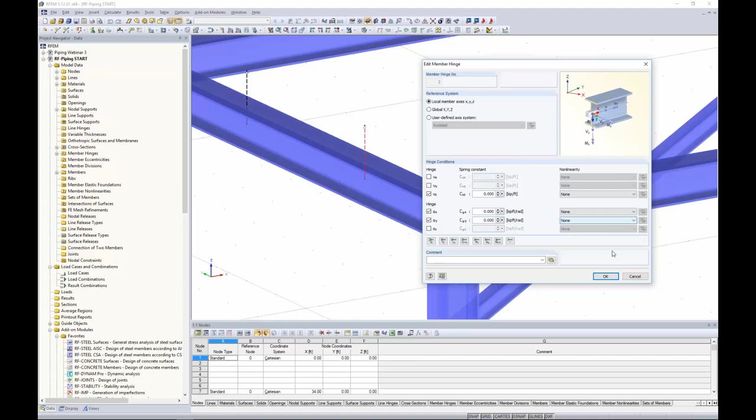Now, taking a look at the rest of the structure, these are just typical W shapes. We can use our project navigator over here on the left to view all of the input data. For example, the cross sections tree, we can see that the W8x35s are defined for most of our members within this pipe rack. We also have some diagonal vertical bracing, W4x13s. So that's really all that I've done so far.

Now, when you go to create a new model within RFEM, or after you've done, such as I have, created the model, we need to go back into the general data. So what we would do is to right-click on our model name, go into the general data, and under the options tab, you'll notice piping analysis. This option is only available if you've purchased the RF piping module extension.

So here we will check this checkbox, and under the details are some additional settings that we need to define. The first one is to define which standard we like to use. We have the ASME B31.1, 31.3, and recently added is the Eurocode.

This option down below at this checkbox is for welded forged T and welded in contour inserts. This just refers to a couple variables, RX and TC, that we won't be using today, but just keep that in mind if you are using those type of components.

The default branch connection type, this will make a little bit more sense later on. So for right now, we just want to set this to reinforced fabricated T, but just keep in mind that this setting is here and I'll mention it later on.

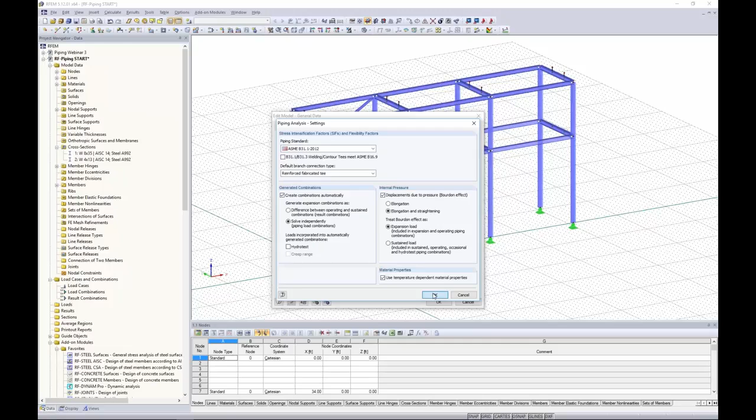When I click OK out of these dialog boxes, you'll notice I'm still within RFEM, but now I have some additional tools available for modeling piping systems. So we want to begin today by drawing a new pipeline—that's this first tool available in our new toolbar.

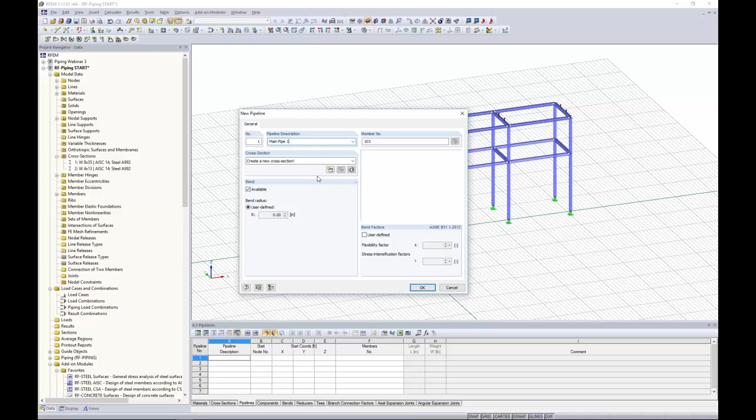For the pipeline description, we'll call this one main pipe 1, and we need to define a cross section. With the cross-section, we'll go into our database and several different manufacturers and standards pop up. You'll notice we have the ASME B31.1. We have NPS and DN—NPS is related to imperial units, DN is related to metric.

For our first pipe, I want to scroll down here to my 8-inch diameter, in particular 8.625, and the thickness of the wall is going to be 0.594. So I can see my cross-section populated here. If I have any questions about what variables are being used for my cross-section properties, I can open up this info box to see everything listed.

The material is also going to be defined within the same dialog box. Here we'll open up our material database. Over on the left we have some filters where we can filter down to the ASME B31.1. These are all the materials listed in Appendix A within the ASME standard, which is quite complete. For today, we'll just stick with A53 grade A, and here are all my material properties.

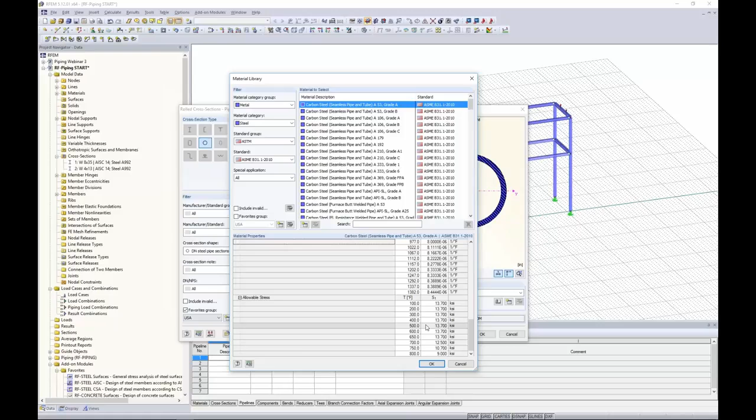This is what I mentioned previously—that as our temperatures are changing, so are dependent properties such as modulus of elasticity, thermal expansion, and allowable stress. These will actually change with each iteration as long as the temperature continues to change as well.

Now that we've fully defined our cross-section and material, both listed in that dialog box we were previously in, the line mass is nothing more than the density of our material multiplied by the cross-sectional area of our pipe to give us mass per unit length. The total line mass is correlated here just with the line mass we've defined so far, but you'll see this begins to change as we define some additional parameters with these other tabs up here at the top.

Design data is important because it relates to our pipe wall thickness checks and pressure checks according to the ASME later on. So we want to initially give some design data here that we plan to design this pipe to—for example, if we plan to use a pressure no greater than 500 psi, and maybe design around 85 degrees Fahrenheit, nothing too hot or extreme here.

The second tab is the bend. You can actually create a different cross-section for the bend of the pipeline, different from the straight pipe. This is important for things like thermal temperatures—they create much higher stresses at the bend. So if we wanted to change this cross-section to a thicker wall, we can do so. The rest of these parameters line up just like what we saw in the straight pipe tab.

Layers. We can include layers such as insulation, plating, and lining. For today, we'll stick with applying an insulation. We want to define the weight of the insulation as 6.37 pounds per cubic foot, and as well as the thickness. So we'll add 2 inches of insulation to the inside of this particular cross section.

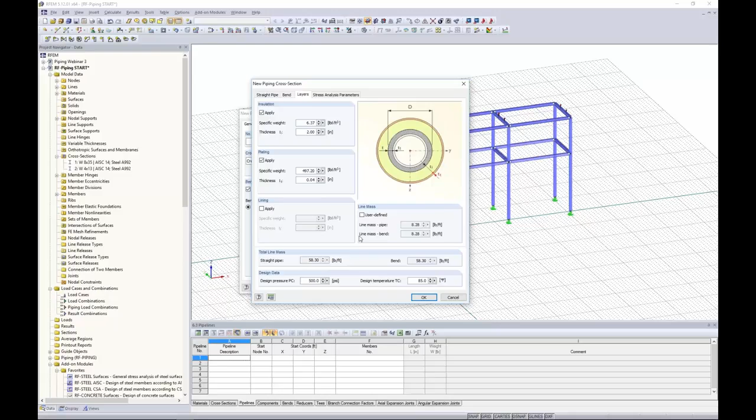We'll also add some plating. For this, the specific weight needs to be quite a bit higher at 497.2, just something that we're given from the manufacturer, and a thickness of 0.04 inches. Now you'll start to see this total line mass increase from what we saw with the first tab.

Because we're accounting for the additional weight from the insulation and the plating. Stress analysis parameters, well, here you can see there's corrosion allowances, mill tolerances, manufacturing allowances, and welding factors. Again, this is important for when we're checking the pipe wall thickness checks according to the ASME. There are some default settings in here, but by all means, you have control to override those for both the straight pipe and the bend.

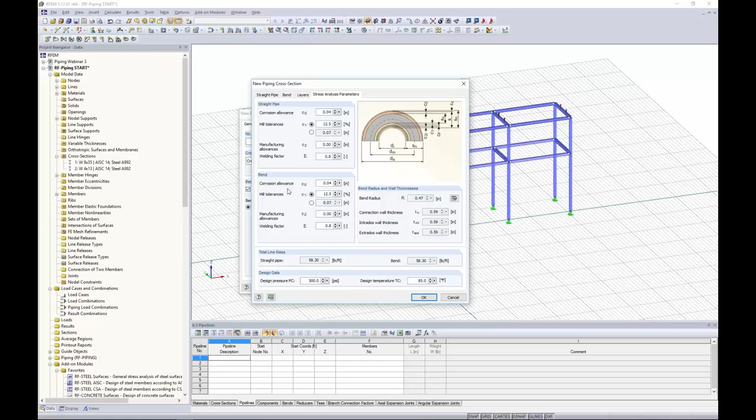Now I can click OK, so we're back to our original dialog box. So we define all the properties for our cross section. Now you'll also notice that we have bend available here.

What this means is that as I begin to draw my pipeline back here in RFEM, I can actually automatically create the geometry for the bends. So right now we have it set to the long radius. The bend radius is set to 12 inches. We can change this to short and use 8 inches, or we can choose a user-defined radius here.

The bend factors, these are calculated from the ASME. The flexibility factor has influence on the bending stiffness of the pipe bend. The stress intensification factor is something that will be used for design later on in our add-on module RF piping design. Again, you can override these with user defined as well.

So now that we have defined everything for our first piping member, what we want to do is to begin drawing it. You'll notice I have these crosshairs available in my graphical interface. What I'd like to do initially is to change the drawing grid around a little bit. So I'm first going to change the plane, and then I can easily select a different origin here. I'm going to snap to the top of this rigid link here.

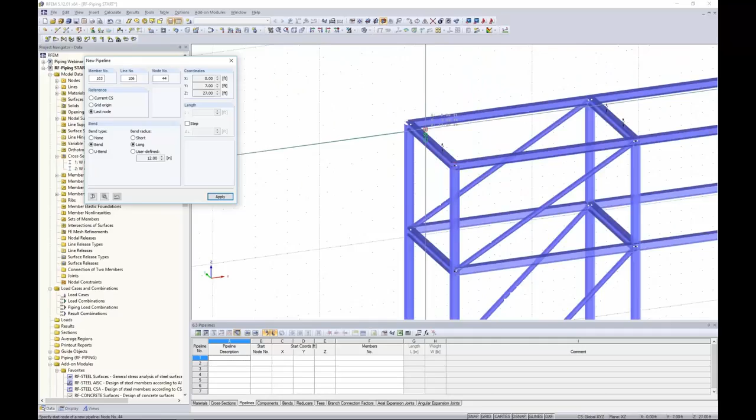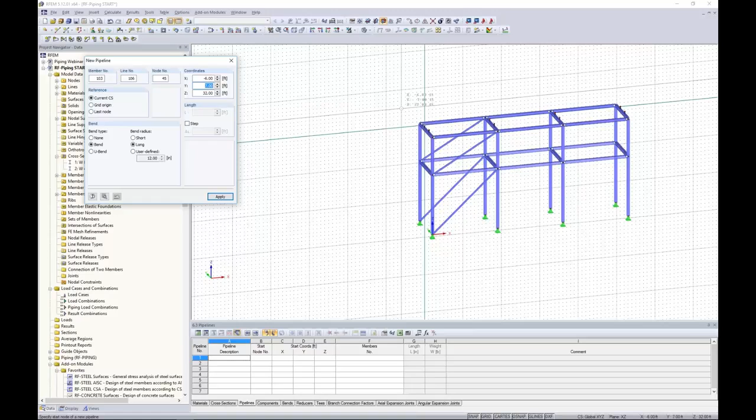So when I go to draw a pipeline, I have a few options. I can choose the current coordinate system, which is what I'm going to do. That will just leave this grid as it is. I can also choose a grid origin or the last node. The last node will dynamically change according to the clicks I make in my model as I begin to draw this pipeline.

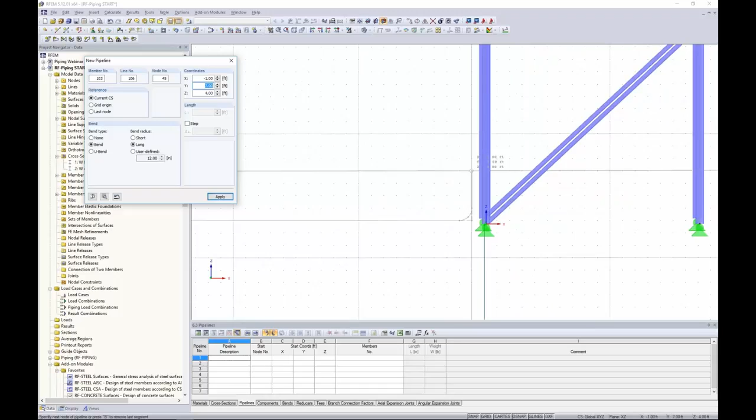So to begin with, we will start in an elevation view here, and I'd like to choose a point -25, 7, 0. So I make my first click, and then I go to a point about a foot away from the face of the supporting structure. Now you'll notice that as I move vertically up my supporting structure, the bend is automatically accounted for. So that's what the bend option does. We can see that right to the left of the supporting structure.

So we go all the way up to the top, and we can begin drawing the pipe across the top of the supporting structure. Now, keep in mind that this drawing grid keeps me in one plane, so I don't have to worry about flying off into space anywhere.

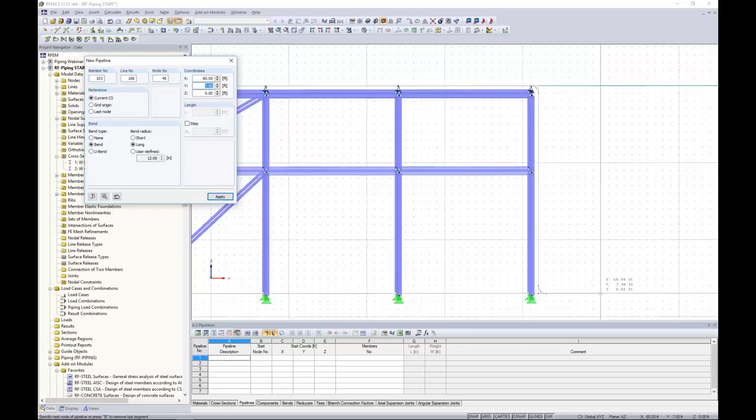Now, when we get to this point over here, what I'd like to take into account is maybe some additional bends to dissipate my heat from my temperature loads. So all while I'm still drawing this same pipeline, I can change my drawing grid back to the XY plane. Maybe I snap back to the bottom of my supporting structure. Then I can zoom in and continue modeling my pipeline here with some additional bends.

So once we are done with this, I will make my last final click here, and we'll snap to a point and right click to finish it. And now my piping is complete. So you can see that if everything goes well, you should have the name of your pipe here called main pipe 1. That's the description that we gave it.

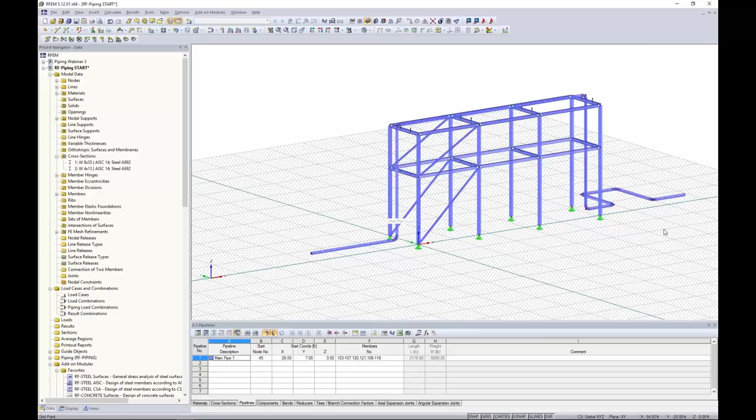Now I want to create an adjacent pipe right next to it, and utilizing some of the features within RFEM to make our life a little bit easier, what I'm going to do is to turn this into a wireframe display model. Now I'm going to highlight my important nodes here, the nodes where the bends occur, by holding down my control key and selecting all of these main nodes where the pipe makes some bends.

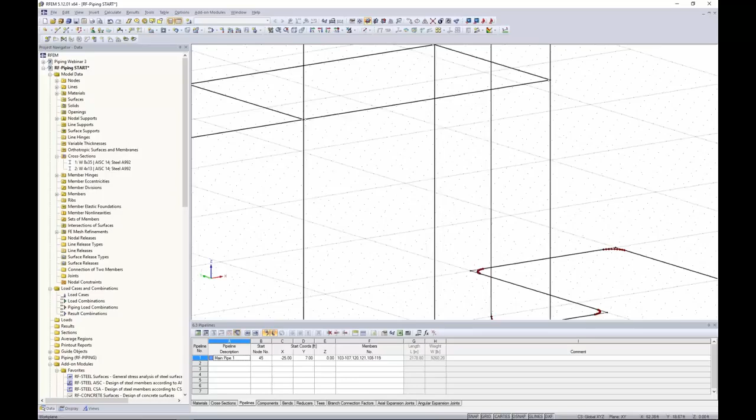Once I have these selected, I can use my Move Copy tool. I'll create one copy and move it -4 feet in the global Y direction. I click OK, and now you'll see those copied nodes are available here.

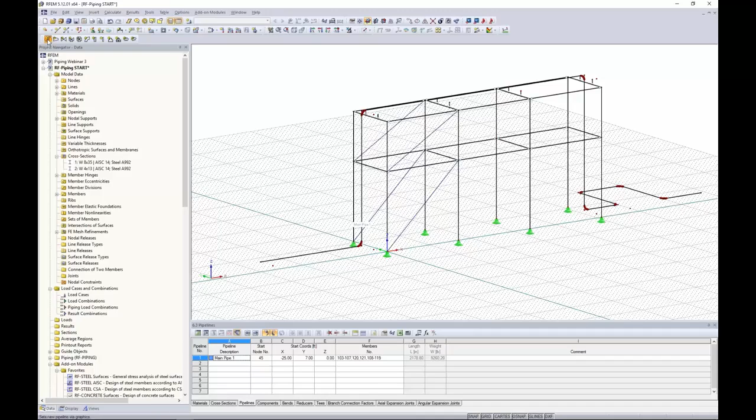So what I'm going to do is create a new pipeline, and this time we'll call it Main Pipe 2. Now the cross section, I've already defined that 8-inch diameter pipe with all the insulation and cladding, so that's available for all my pipelines to use in this model. I want to use that same cross section, so I don't need to redefine anything. I'll use the same bend as well, and I can click OK.

The reason I created those nodes is so I can easily snap to them here without having to change my work plane like I did previously. Just using some of those special features we have in RFEM to make modeling a little bit quicker, and I right-click to make my last point.

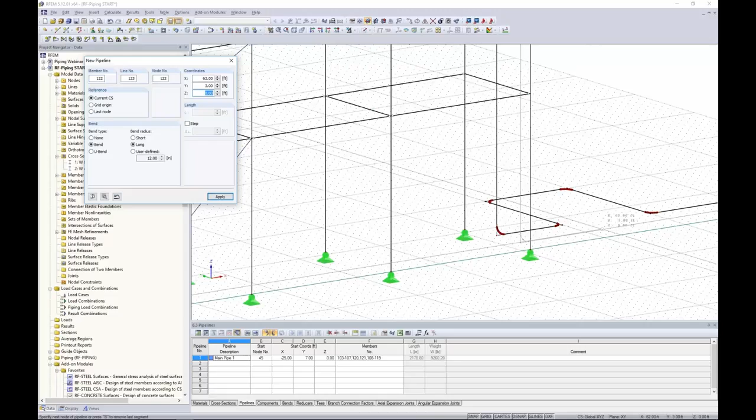If I turn this back into rendered view, let's say this pipe really would like to extend out a little bit further than what I have shown. Instead of redrawing everything, I can take this node and simply drag and drop it so that it's adjacent to my Main Pipe 1.

And again, everything went well. We see the name Main Pipe 2 here. Now the pipes are kind of blending into the rest of the structure, so you can't really tell what's going on.

Under the Display tab in the Project Navigator, this controls everything we view graphically, whether that's input data or our results we'll see a little bit later on. If I scroll all the way to the bottom, I have this option to change my colors and graphics according to criteria - right now it's just set to the standard.

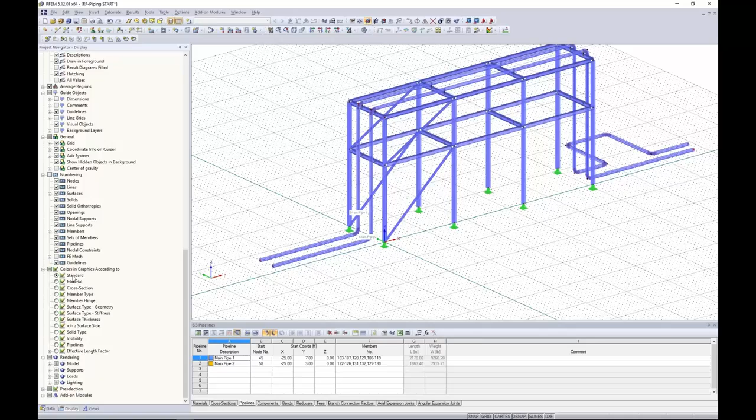We can choose material, cross-section, but we also have pipelines. When I choose that option, my panel pops up and shows me exactly what my Main Pipe 1 and Main Pipe 2 are with different colors, setting them apart from the rest of the supporting structure.

What I'd like to continue doing is draw in a couple of straight pipe members, just short segments that frame into this Main Pipe 1 so we have some intersections. I'm going to go back to the new pipeline, and we'll just call this one Pipe 1.

I want to define a new cross-section here, so up pops our cross-section database. You'll notice we can go back in and filter through this long list. We also can create a favorites group - by activating my favorites group, I've edited it so I've just added the 2 cross-sections I'm using in today's webinar. You can imagine that if you use a handful of cross-sections quite often, this is a great way to quickly select them.

For this one, I'll choose the 6-inch diameter pipe. We have a wall thickness of 0.31. My material is remembered from my last cross-section, so we don't need to make any changes. I click OK. As far as the rest of these tabs - bend, layers - I'm going to keep everything as default. I'm not going to add any insulation to this. I'll set the design temperature to 585 degrees Fahrenheit and click OK.

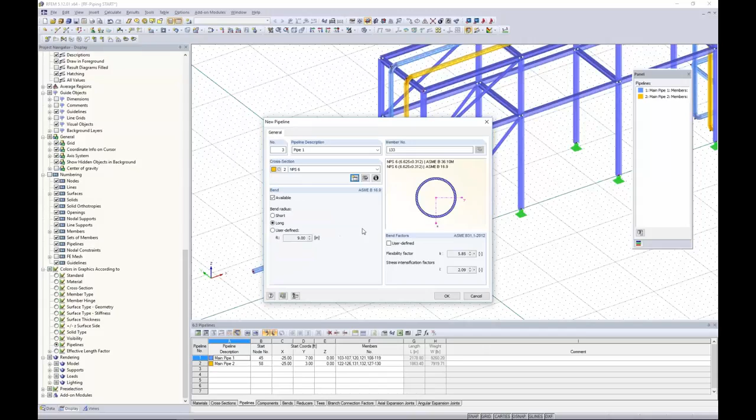I click OK once more, and I think it's easiest to change this to my current coordinate system and to change this to wireframe view. That way I can zoom in here, and my first point I'd like to choose is -1570. Then all I need to do is snap to a point which extends out. I right click - that's my first pipe.

Creating once more a new pipeline, we'll call this one Pipe 2. I've defined that smaller section, so I always have that available in this particular model. I click OK, and then I can again change this to current coordinate system - that's what I prefer to work with. Here we'll choose -870 and snap to a point out here, right click.

Showing the rendered view, we now see those additional pipe sections shown here, and everything is colored differently so we can tell it apart. Now that I have modeled my pipelines, let's move on to the piping components - that's where the rest of these tools will come into play.

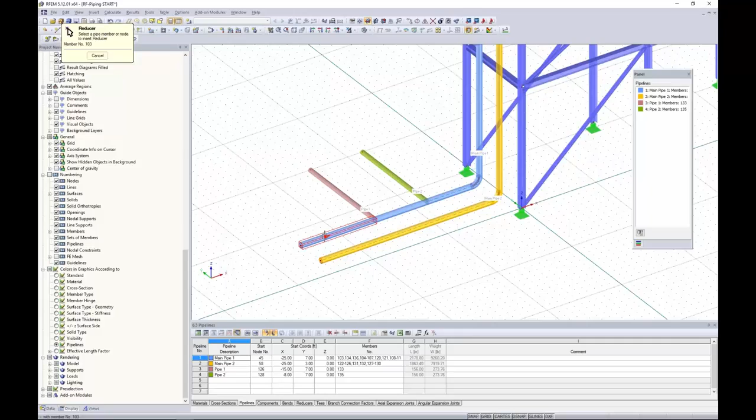So the first thing we want to define is a new reducer. When I click on new reducer, the program requires me to click on the pipe I'm going to apply this reducer to, so I click on this first pipe section here. Now, reducers are used to transition from a larger pipe to a smaller pipe, or vice versa.

Within this dialog box, the first thing I need to define is which dimension to change, towards which node. This is actually opposite of what I want to do right now, so I'll click on my beginning node here. You'll notice my reducer start allows me to choose that smaller cross section we've already defined, or you can create a new section.

The reducer end is grayed out because this is going to transition into the pipe I already have defined. What I do need to define is where this reducer starts, so we'll start at about 48 inches from the start, and you'll notice this big red arrow pops up exactly on the pipe where we're going to apply this reducer. The length can also be applied at 12 inches, and there's our second red arrow showing us where the reducer end is.

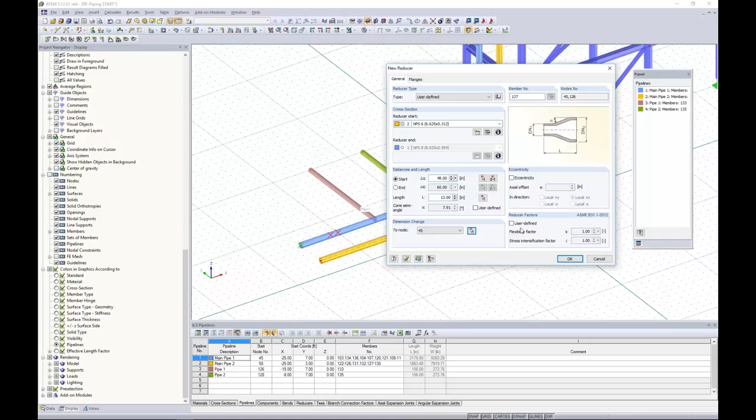You can also define an eccentricity here. Eccentricity would be useful if you want the bottom of the pipes to be flush. In our case it doesn't matter, so we'll keep this as is. Again, the reducer factors can be overwritten here if you'd like to do so.

Now, for a lot of these components we do have a library. Unfortunately this library is more relevant to Eurocodes and European manufacturers. This is something we do plan to implement with some US manufacturers in the near future, but for now it's easy enough to just set this as user defined.

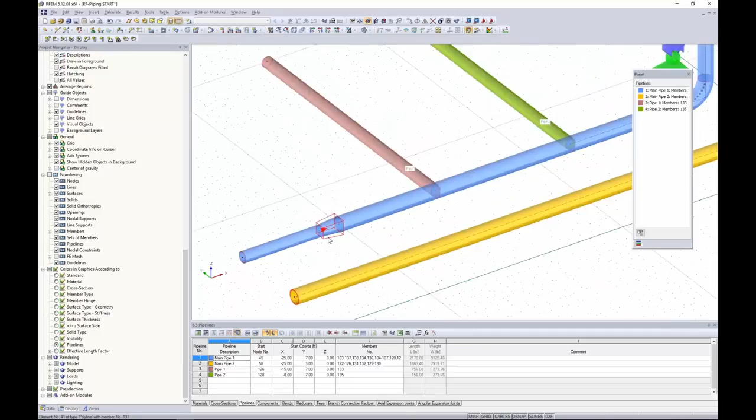For flanges, this is where maybe we would weld flanges to our pipe and bolt them together at this reducer location. Now, I'm not going to apply flanges, but we'll do this plenty more times with other components today, so that will be more clear in just a minute. And I click OK. Now if we zoom in, we can automatically see that reducer applied here with the smaller pipe section on the left.

Moving down our list here, we have three options for valves: a two-way valve, a three-way valve, and a four-way valve. Pretty self-explanatory - a two-way valve is used for two pipes connecting together, a three-way valve would be an intersection of three pipes, and a four-way valve of four pipes.

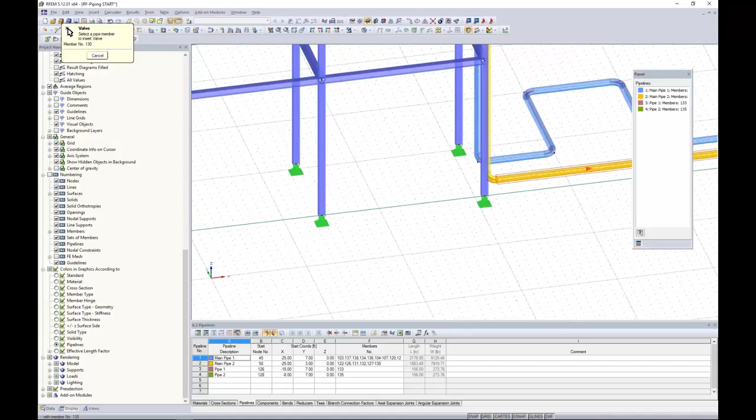Starting off with our new valve, just two-way, we're going to move to the other side of our model, and in particular main pipe 2, we're going to select this pipe here. So up pops our dialog box for a new valve. We just want to specify where this begins, so we'll start at 12 inches from the member start, indicated by my red arrow here.

The length will be 12 inches, and we have some parameters here that are automatically created, such as the multiplier of the insulation mass set to 1.75, and the multiplier of thickness set to 3. You can override those, which ultimately affects our mass here, or you can set a user-defined mass as well.

The flanges - this is where maybe I do want to apply some flanges. We're going to plan to weld those flanges to both the valve and the pipes and bolt them together. So for our flanges, we want to check the checkbox that those are both available.

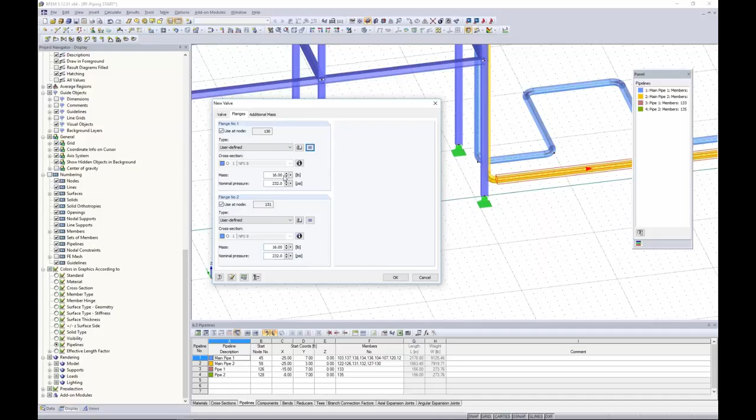Our nodes are automatically generated here of where that flange is going to occur, and we can simply define the mass here of our flange as 16 pounds, and maybe the nominal pressure is 232. Again, this is just information that we would get from a manufacturer. What's also nice is that I don't have to re-enter this information, but I can just set it to all - this will automatically populate the same flange settings for my other node.

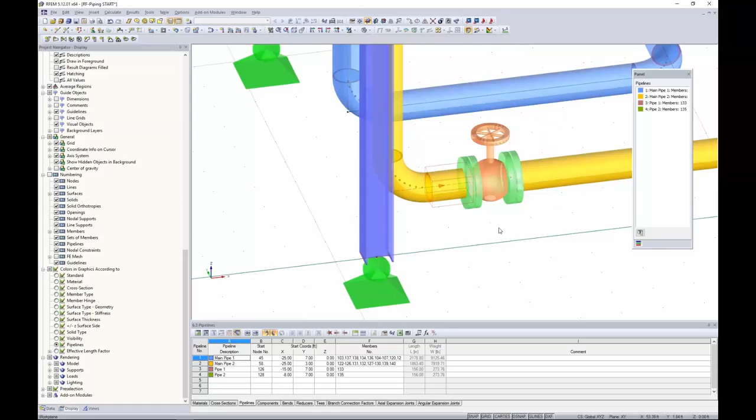Now, the additional mass tab here is useful for our hand wheel if we have additional mass we'd like to take into consideration, as well as the eccentricity away from the original flange - something to keep in mind. Once I click OK, we can see that flange is automatically created visually here and will be taken into account for stiffness, analysis, and design. So that makes sense for our two-way valve.

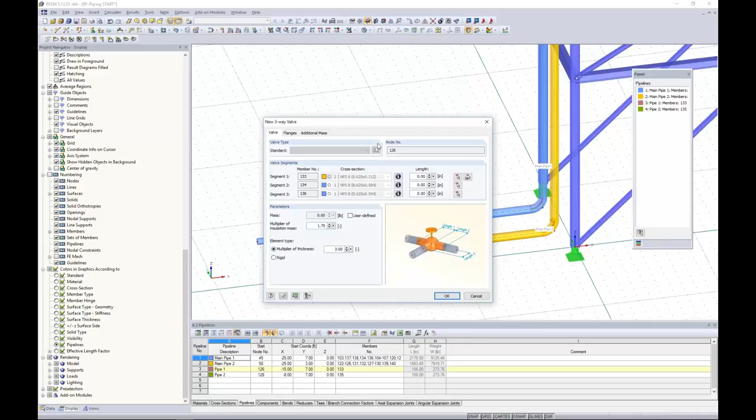Now, in a similar sense, we will apply a three-way valve. Instead of selecting a pipe, we have to select an intersection. So I select this first intersection here where we have pipe 1 framing into main pipe 1. The cross sections are automatically generated according to what we have modeled in RFEM, and we want to give it a length for all three piping components here, 12 inches.

Our red X indicates where that occurs. Parameters, same thing that we saw within the two-way valve. We have a multiplier of insulation mass, multiplier of thickness. Our flanges here, we do want to create flanges at all locations.

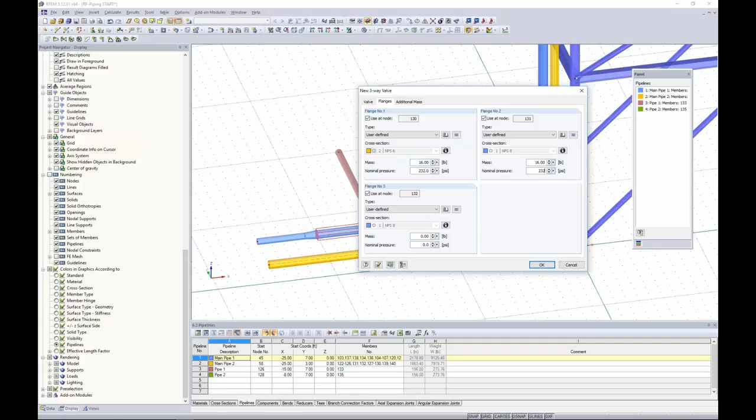This will be 16 pounds, 232 psi. Now if I try and set this to all, you'll notice nothing happens for my other two flange entries. The reason is because we have a different cross-section defined here. The program will only automatically assign the flanges to the same cross sections. So if I move over to my 8-inch diameter pipe and type in 16 pounds and 232 psi, and click equals, that will set the flange for the third node automatically.

The additional mass can be considered with the hand wheel here. Once I click OK, we should see that three-way valve generated graphically. So that's what a three-way intersection would look like.

Now, four-way intersection, same concept. We don't have any intersections of 4 pipes here, so we won't be applying that today.

Right next to that is the new bend. A new bend is useful had I not created, to automatically create the bends when I drew in my pipeline. So perhaps these two elements here, these two pipes connected at a 90-degree angle, and I wanted to go back in afterwards to create that bend. You can always do so with the bend tool up here, define the radius, define a different cross section if you'd like as well.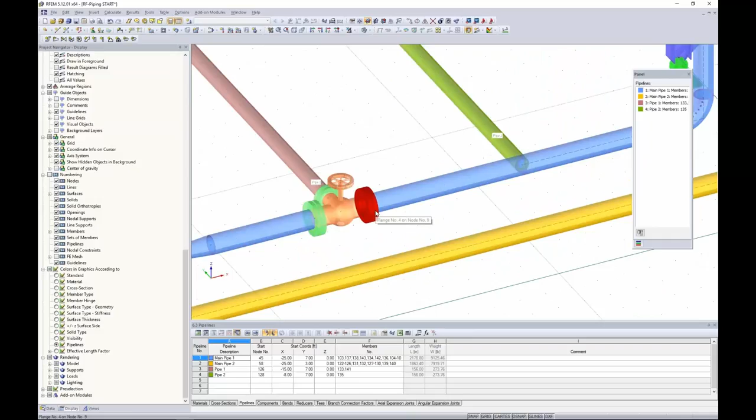Next to that is a new flange. This has nothing to do with some of these other components, but you can purely apply just a flange to any segment of a pipe. This might be useful if you have 2 extremely long pipes and you would like to add a break there, bolted together with a flange. You can do so by adding in that flange.

We also have a new blind flange. This would be able to lock nozzles and piping ends. So for example, we could add a blind flange here at one of our piping ends.

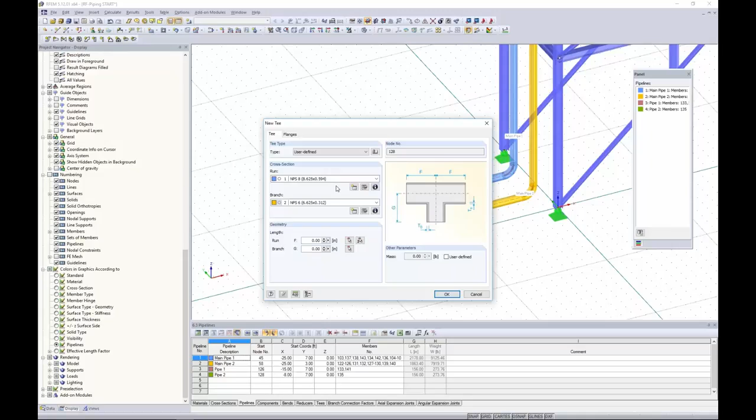A new tee would be an intersection of 3 pipes, such as what we see here with our pipe number 2. Nothing too fancy with this. We have the cross section defined with the run. The program automatically assumes that's our 8-inch pipe, and the branch is going to be the smaller 6-inch pipe. Then we just simply define the geometry, and again, we can add flanges here.

For our case, instead of doing this, I'm actually going to apply a new branch connection. So again, I click this intersection. Now with the branch connection, remember back in the general data, I said that we had to set a default option for the connection type. Well, that's where this comes into play.

So we set the reinforced fabricated tee so that automatically when I jump into this dialog box, this is what will always be automated. Now, if you use something else quite often, then you probably want to go back to the general data and change that default value. You can always come in and individually select them as well. So for us, we're going to choose a reinforced fabricated tee.

All of our cross-section dimensions and factors are automatically calculated here, but what we do need to define is the thickness of our reinforcing pad or saddle thickness. This is important to give the pipes some additional reinforcement or thickness at maybe where we have some high stress locations. For today, maybe we put in a 1/4 inch thick saddle thickness and weld that directly to our pipes. Once that's done, I click OK.

Now this is indicated graphically with just a ball at that intersection. As far as the other 2 options here for axial expansion joints and angular expansion joints, I will get into that later after we do design. So for now, we'll continue to move on.

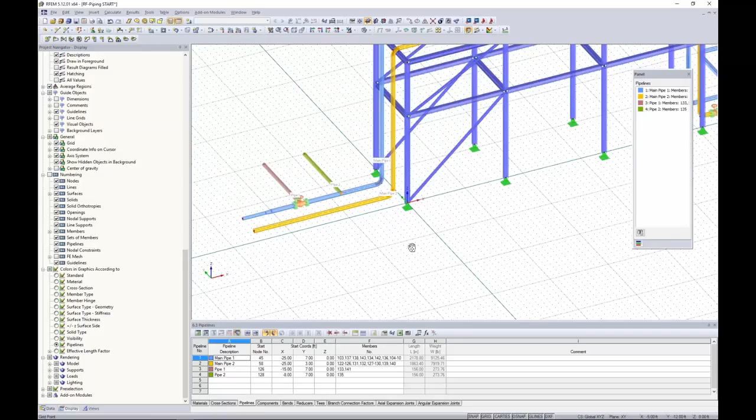So before we can start loading our structure, we need to support it. Just like we support our piping members before loading, we need to support them. Just like we supported our supporting structure here, you can see at the bottom of the columns we have nodal supports. We have to do the exact same thing to our pipe elements. So we don't have any additional features for supporting the pipes. It's just what you would use in RFEM for all the rest of your members as well.

So in our case, we want to create a new nodal support. Now with a nodal support, we have 6 degrees of freedom, 3 degrees in translation, 3 degrees in rotation, that we can fully fix or fully release.

We also have a spring constant here. So if you have something that's not fully fixed, not fully released, but somewhere in the middle, you can define a spring constant and you'll have partial fixity.

Lastly, we can define nonlinearities. It's not completely uncommon that maybe for a piping support, you have some type of friction support, so it's dependent on your normal forces. You can define all that with the nonlinear capabilities within the program. I'll repeat this again, but nonlinear supports is something that cannot be taken into account with result combination. So just keep that in our heads, but we'll revisit that later.

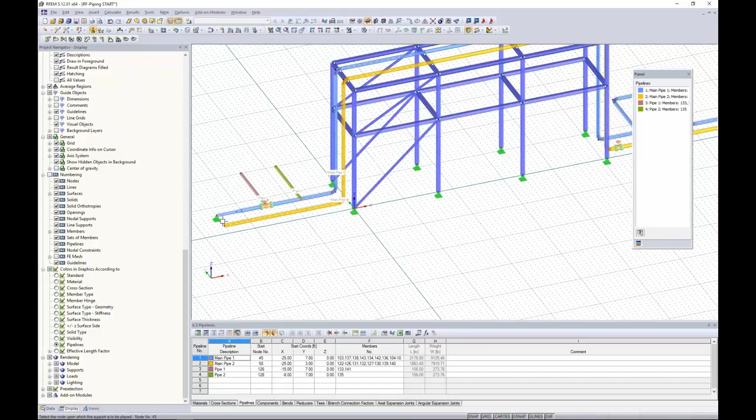So for today, we want to use just a typical hinge type application, one of the default options within the program. I click OK. So what I'm going to do here is simply click at the ends of my pipes to support those with that basic nodal support.

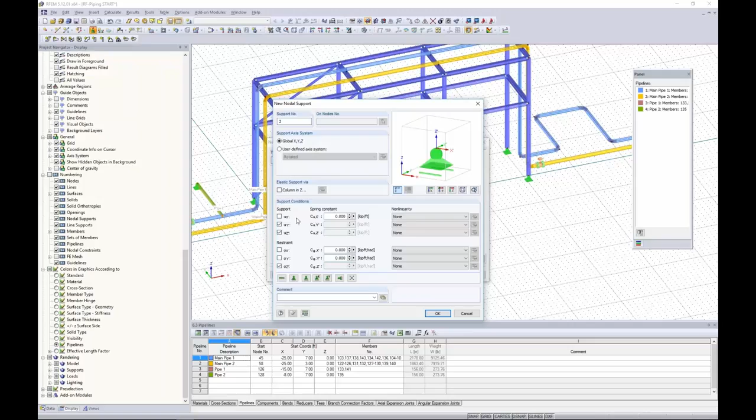In a similar concept, going back to my nodal supports, I'd like to define a new definition. And this time I want to fully release it in the X direction, so some type of roller support that allows translation in the global X direction. I can click OK, I click OK.

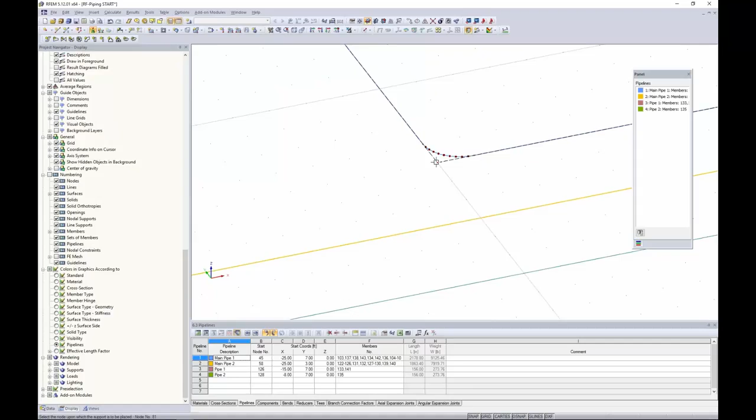So now for this type of support, I'm going to turn this into wireframe view and zoom in here. These will want to be applied right at the bends of the pipes. Now I'm not applying it at this node, which kind of indicates where our bend occurs, because this node doesn't technically lie on the piping member. We need to apply it directly on the pipe.

So for this, I'm just going to highlight these nodes right at the bends on both sides. Once we've completed on the right side of the structure, we'll zoom in to do this on the left side.

Now, once more going back into the nodal support, because I've defined these new nodal supports, I can always select them within my drop-down box here, but I want to create one more definition, and we're going to release this in the global Y direction. So this will allow movement in the global Y as a roller support.

I click OK, and that's where we want to maybe apply this to our pipes up here where we added in these additional bends. Okay, so now our structure, including our pipes, are fully supported.

What I'd like to move on to now is loading of the member. So for this, we want to create some additional load cases. I go to add a new load case, and up pops my load cases and combinations dialog box.

Now, for those of us who are familiar with RFEM or just structural design in general, we of course have action categories according to the ASCE 7 or the NBC, according to live load, dead load, wind load, and so forth. But when you have the RF piping module activated, you'll notice that we have several more action categories available here for our piping load combinations, such as piping self-weight, we have fluid, we have pressure, snow, wind, even cold springing, hanger, hot loads, and cold loads.

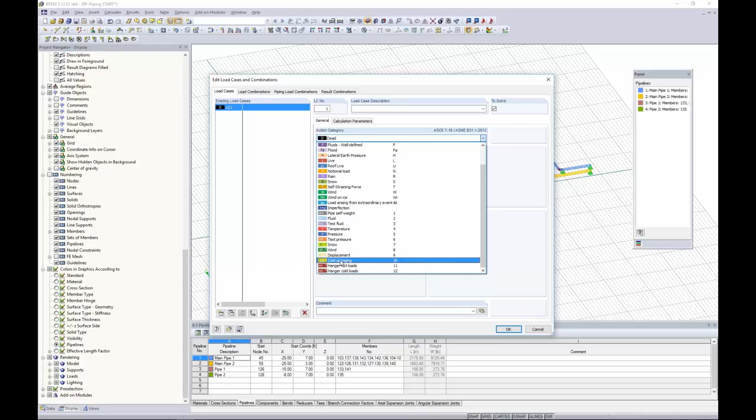So for our first load case, we will define a pipe self-weight. We'll give it the name pipe self-weight. The self-weight will be activated here with this checkbox as -1 in the global Z direction.

Now we create a new load case. We uncheck the self-weight because we don't want to account for that twice. This one will be for fluid, and we'll call this one pipe fluid.

We create another load case. This time we will name this one temperature 1 and assign the appropriate action category. I can make a copy of these as well. So now all I need to do is redefine temp 1 to temp 2, creating another load case such as pressure, and we'll call this one pressure 1. Making a copy, we'll call this one pressure 2. So now all of our load cases are complete.

I've applied no loads, but I've just defined the load cases that eventually those applied loads will fit into. So now I want to take a look at my piping load combination.

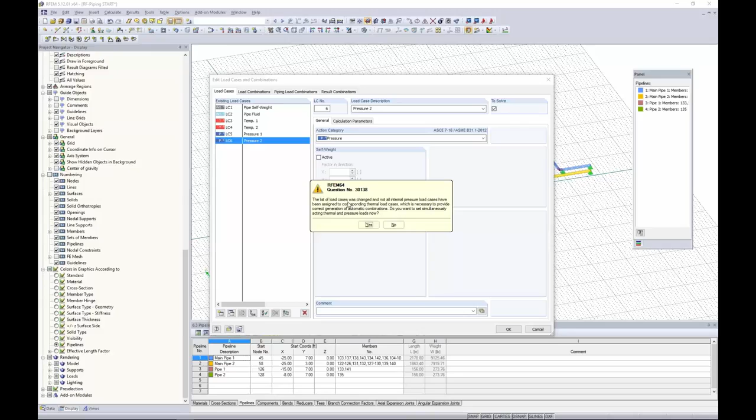So when I try and click another tab, I automatically get this RFEM question. It tells me the load cases were changed. Not all internal pressure load cases have been assigned to corresponding thermal load cases. Do I want to do this now? Yes, I do. So now up pops an additional dialog box, which simply assigns my temperature load cases to my pressure load cases.

Now the program makes some assumptions here, but if I don't like these assumptions, I can always use my dropdown to make changes, or I can add in some different combinations here. So that's important for our load combinations.

Under the piping load combinations, we see some automatically generated load combinations, such as for sustained, for operating, and for expansion. So these are the various stress types, and they are incredibly important because this tells the program, once we get into design a little bit later on, exactly what load combinations to use in each of the particular sections

Now, had I chosen to create these load combinations manually, I still need to assign a stress type. Again, it's important for our ASME code design later on.

When we take a look at the sustained, take a look at self-weight, pipe fluid, pressure, maybe no content weight is just the self-weight. We also have the operating, which is going to be all 4 load cases acting at once.

Now we get into the expansion load cases, and this is something that is very important and relies on our settings and our general data. So remember how I said we're not going to create result combinations, but rather we're going to create only load combinations - well, this has to do with these expansion loads.

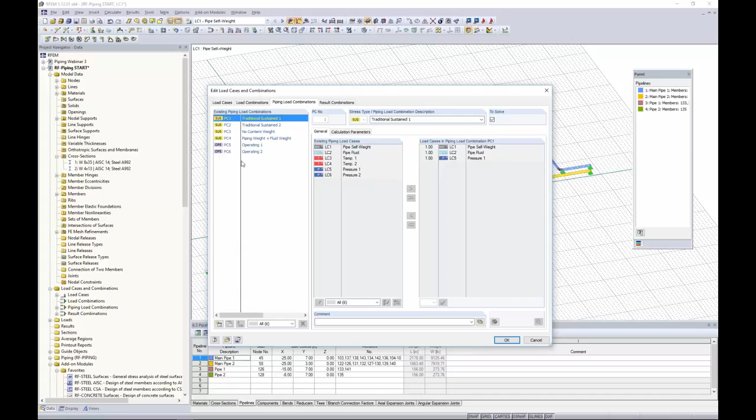So going back into my load cases and combinations, looking at my piping load combinations, you'll notice my expansion loads are now gone. Those load combinations are not being generated here, but rather they're now under the result combinations.

So how is this different? Well, it's still called the same expansion 1, 2, and 3. But now when I look at the details of this, what's happening here is I'm taking my load combination PC5, which is my operating 1 load. I am subtracting out, indicated by this -1 sign, PC1, which is my load combination for traditional sustained.

So to make this a little bit more clear about what's going on, let's go back to our piping load combination. So we're taking PC5, which is all 4 load cases applied at once. We're going to get the stresses and everything from this. Then what we're going to do is we're going to subtract out the internal forces and in turn the stresses that are generated from this traditional sustained, which you'll see is all 3 load cases, but temperature is not included. So all we're left with is just the stress generated from the temperature.

Now this result combination makes a whole lot more sense than what we saw previously under piping load combinations. The reason for that is because we're probably not, actually we'll never have the temperature applied alone. Of course, there's got to be self-weight, there's got to be fluid running through the pipe, and so forth.

So that's why this makes a whole lot more sense. But there's the downside that material nonlinearities cannot be taken into account, as well as geometric nonlinearities. So when I mention things like the nodal support with friction or sliding, that's a geometric nonlinearity. You'll get a warning message for your result combinations, and they cannot be taken into account accurately. So just something to keep in mind, it's kind of either or.

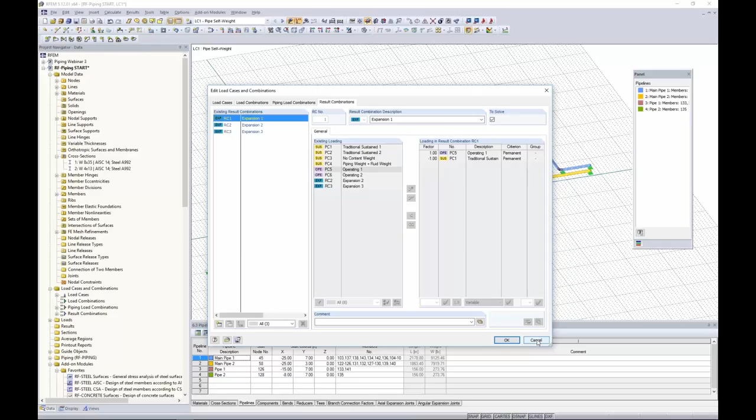So for today, what I'm going to do is to go back into my general data. I'm going to change this back to solving independently because I am using my temperature dependent material properties.

Okay, so now that we have these load cases defined, you'll find those in our drop-down box available up here in our toolbar. We want to begin loading the pipes.

So we'll start off, pipe self-weight, we'll just leave this as is. We won't apply any additional loads. Now the piping fluid - what I'd like to do is to select all my members to apply the piping fluid to. Now right now it's kind of confusing with my supporting structure.

Under the Views tab, we have some generated views that as we began to model, the program generates these. And one of those options is the pipelines tree here.

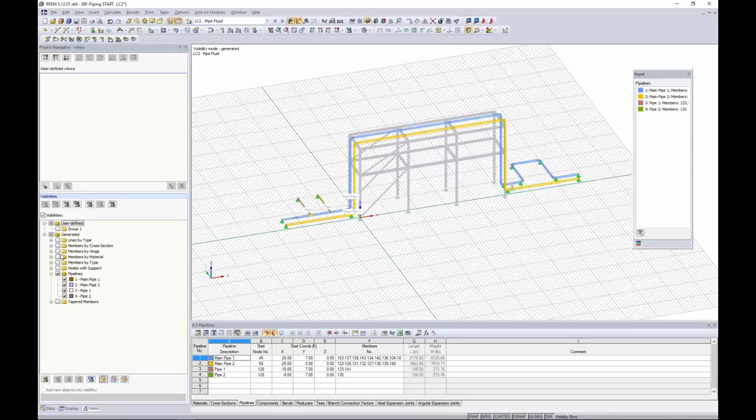So what I can do is check this checkbox, and now my supporting structure I can no longer select - it's not visible. What I can do is make changes and select all of my pipelines. So that's a useful feature, this Views tab, if you're looking to highlight various options within your model.

I'm going to highlight all of my members and apply a new member load. Member load is exactly what you think - we can apply a force along a member, but for our pipes today we want to go under Extra, where we have the option for pipe content full. This assumes the pipe has all the fluid fully contained and completely full, and all we need to do is give it a specific weight.

The other option is pipe content partial. This is nice because if we know the pipe is only partially filled, all we have to do is specify the distance D in inches, give the specific weight, and the program automatically calculates the internal force based on the fluid partially filling the pipe. For today we'll assume it's completely full, with water being applied through these pipes, so a specific weight of -62.4 pounds per cubic foot.

I click OK, and now visually I can see this load being applied to all of my members here.

Now I changed my load case at the top to temperature. My members are still highlighted, so we go back into our new member load and apply a temperature - here we specify perhaps 65 degrees Fahrenheit, nothing too special. I click OK, and graphically we can see this temperature load applied to all of our pipes.

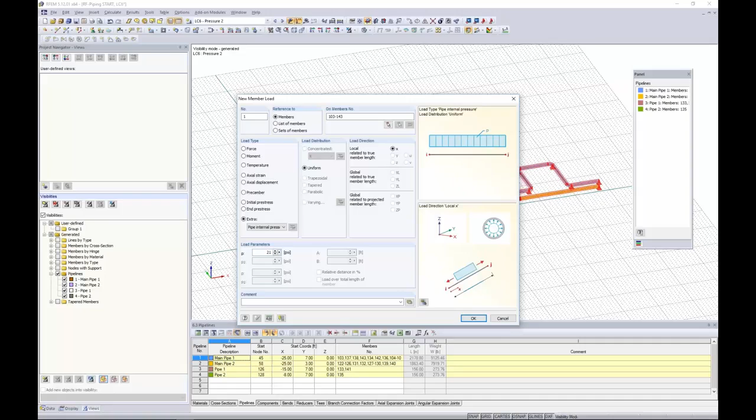Lastly, one more load for pressure 2, just changing the magnitude here to 218 psi, and I click OK. So now these loads are done, but what's nice is not only can I scroll through my load cases...

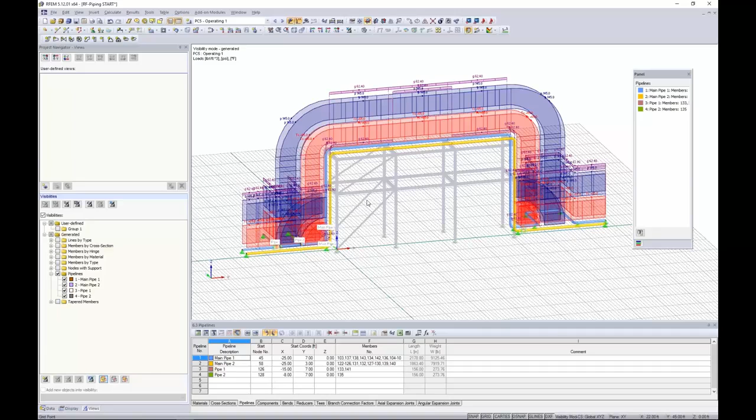...but maybe I'd like to take a look at some of my load combinations - for example, operating. This is with all 4 load cases acting at once, so I can see those loads stacked on top of one another and exactly how they're going to be applied visually to my particular members.

Okay, so now we're ready to run a design for the ASME. We've fully loaded this structure, fully supported it, and added in all of our piping components. Everything looks to be good.

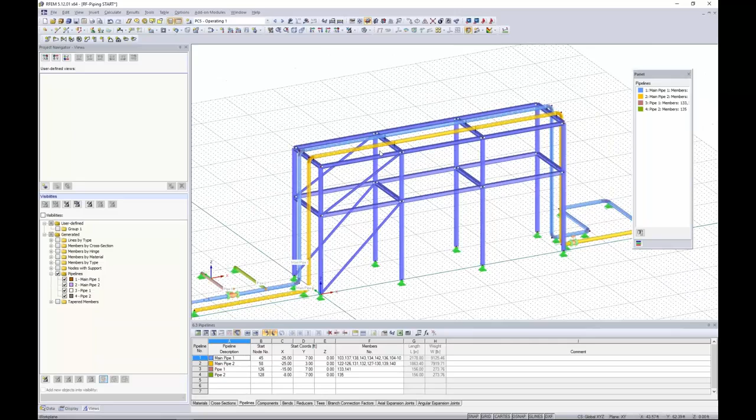So now we'd like to move on to the Data tab. You can see here our long list of add-on modules, and in particular we want the RF Piping Design module. Any one of these modules you can right click and choose as your favorite to move it up to the top of the list. So we're going to launch RF Piping Design, design of piping.

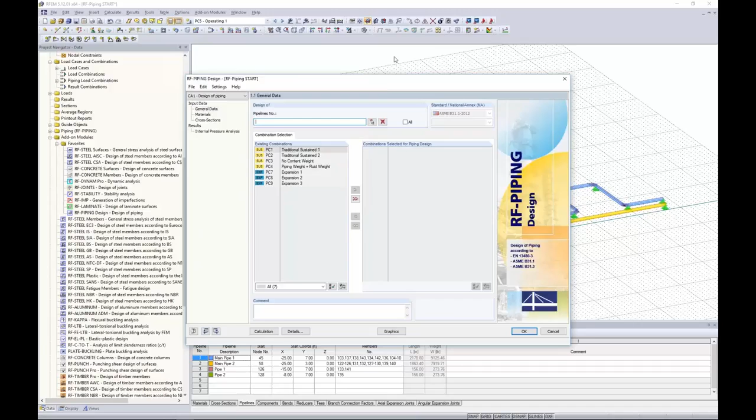Now this is just a simple dialog box - those of us familiar with RFEM, this module looks like all the rest of them. So what we'd like to first define here is the pipelines to design. I can simply select my All checkbox, so now we'll design pipes 1 through 4.

Now the standard can also be selected, not here, but back in the General Data tab. This is a little different than some of our add-on modules - that standard has to be generated within the general data. We did select B31.1. I'm going to move all of my load combinations to be considered for piping design, so you can see here my sustained and expansion loads are going to be utilized appropriately within the ASME.

Now moving down the list, I have my materials - this is my A53 brought in from RFEM, so I don't have to redefine that. What's further defined are just some of those material properties, if I'm curious to see those again.

Cross-section, same concept. Those are brought in directly from RFEM. I don't need to do anything further with these here. Here are my cross-section properties given to me again.

You'll notice that I actually have results available even before I've run a calculation within the program. This is checking our wall thickness and our pressure, doing a couple checks from the ASME, all without running a calculation. So how is this possible?

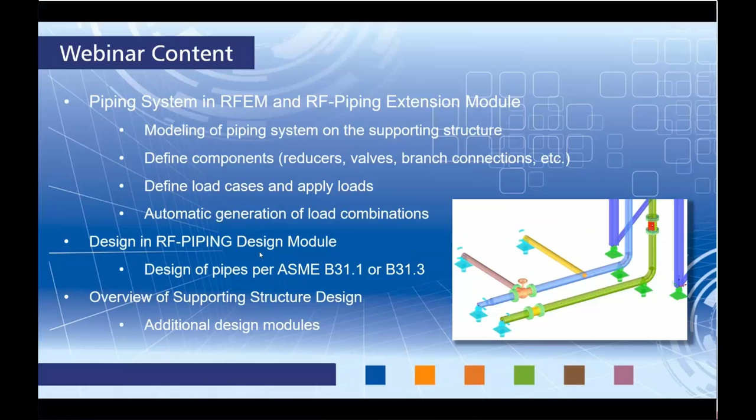For this, I want to jump back to the PowerPoint. This section within our RFEM add-on module is called Internal Pressure Analysis. It refers to the ASME B31.1, section 104.1.4. This allows us to check the minimum wall thickness for pressure and temperature. That's what these equations are given within the standard, equations 11 and 12 at this section.

Now there's 2 equations here, so we have some variables that we're looking at. The first variable, P, is going to be referred back - remember when we created our cross-section and I said let's give a design pressure here. So this is what I'm telling the program: I plan to design this pipe for 500 psi or less. That design pressure value is going to be utilized within these equations as P.

We also have some other variables: capital D sub naught, which is our outer diameter, and smaller d, which is our interior diameter. That's why there's 2 separate equations here.

We also have SE, which refers to the max allowable stress based on our material for our particular pipe. We have a couple other variables, W and Y, which are the weld strength reduction factor and the coefficient directly from the standard. Both of those are dependent on temperature. This is why we defined a design temperature, because these coefficients may change as well as some other parameters depending on what our design temperature is.

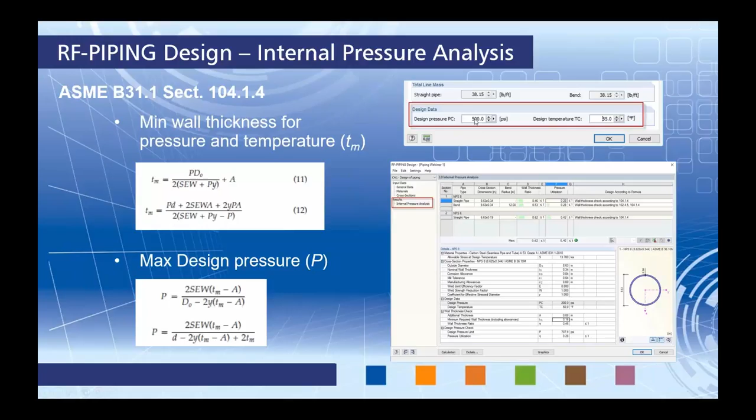So we cannot exceed this max design pressure, which will double check that to what you have entered in here for your cross-section parameters. So those checks are going on within RFEM, our add-on module, before even running the calculation. You'll notice here I have both my 8-inch section and my 6-inch section. We will check it for both the straight pipe and the bends, because there are different checks for bends as well. We give you the code references.

Here you can see the wall thickness check, we have a ratio for that. We also have our design pressure check. So we will check both of them for you before running that calculation.

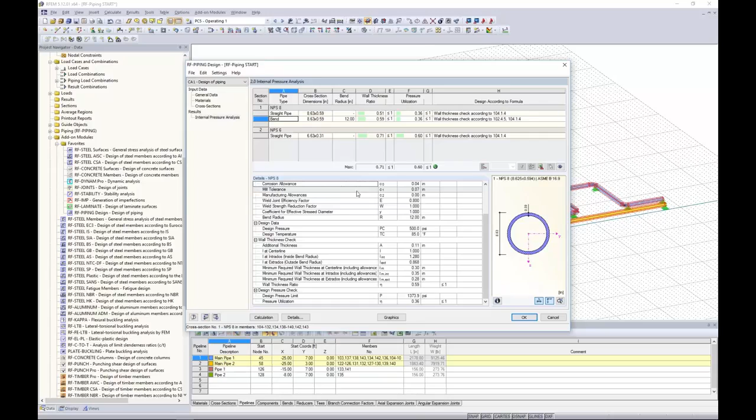Now, before moving forward with the rest of these stress checks, I want to visit the details button here, which brings up our additional detail settings. Most of this is just some further details that we specify according to the ASME, such as the number of thermal cycles. We always give a code reference here, so you can quickly look that up in the ASME B31.1 to understand what exactly you're setting.

The occasional load factor K, you can see here we have some different settings. 1.15 is going to be used for loads acting for less than 8 hours and less than 800 hours per year. 1.2 would be used for less than 1 hour and less than 80 hours a year, and 1.0 would be the most conservative. We use 1.15.

Corrosion allowances, we have two options with this. Those corrosion, mill, manufacturing allowances can either be applied to the stress calculations according to the standard, so whatever the ASME tells us to apply it to, or to all stress calculations, which, as the program tells us here, is a more conservative approach.

A couple more stress options - again, we can just refer directly to the standard to take a look at these. We'll leave them as default. Something recently added is hoop stress, calculated using either the inner diameter, but you can see that we also have the drop-down box to use the mean diameter or outer diameter.

We'll just leave this as inner diameter. Now that we have defined those details, we can move forward with our calculation to see if everything will hopefully work okay this time. Again, running through both load cases and combinations, and we should be seeing results here, and yes, we do.

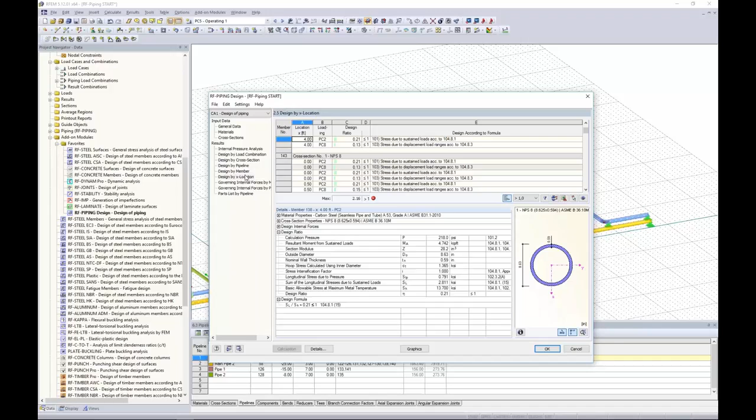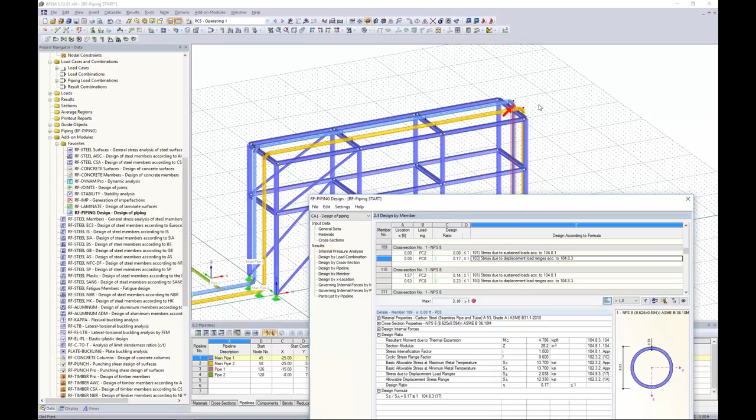Moving back to my design by member, you'll notice that as I scroll through this table, if I drag it down here, in the background the RFEM graphics are synced up to my table, so I can see exactly what stress check I'm looking at. This big red arrow will show you exactly where the controlling internal force for that particular stress is located. In our model today, not so helpful, but with a very large model this will be extremely helpful if you're looking at this big giant table and want to get an idea of where you're at within your structure.

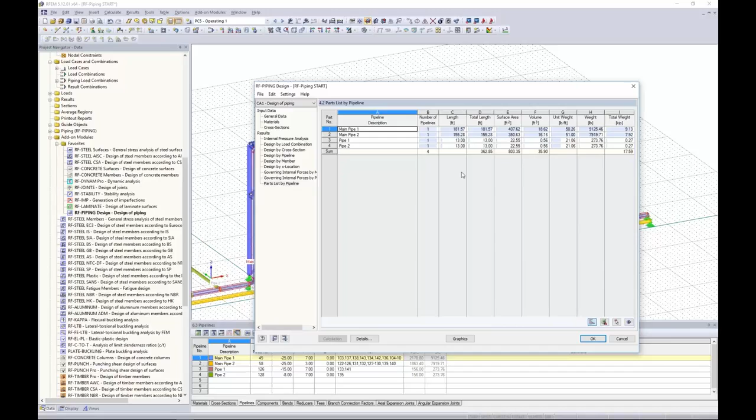We also have a parts list by pipeline material takeoff. So when we go back to design by load combination, you'll notice here we have some red numbers, and I have a big red sad face because I am above 1.0. So there's obviously something I need to address in terms of my temperature stresses and the stress checks related to the code. The tables are nice, but I'd like to move into the graphics back in RFEM to see exactly where this is occurring.

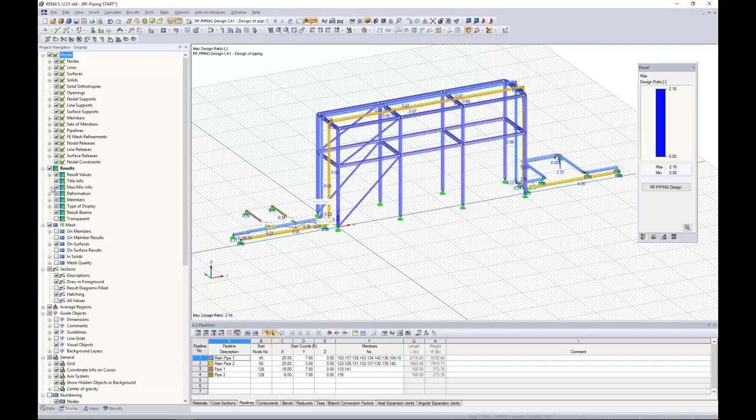We can choose the graphics button here. Now when I go back into RFEM, I'm technically still in this add-on module, just viewing the results graphically back in RFEM, and you can see this with our drop-down box here. Right now I'm showing the design ratios along the pipe members. I can't really see what's going on, but remember under the display tab I mentioned that everything we view here graphically is controlled within our display project navigator, even the results. Under the results tree here, for members, I can change this to a few different options, one of them being cross sections.

Now I have colored cross sections that I can scroll along the pipes to see exactly where my problem occurs. Well, it looks like these two bends here are a big problem when it comes to our temperature loads and stress designs. So I need to do something with regards to that.

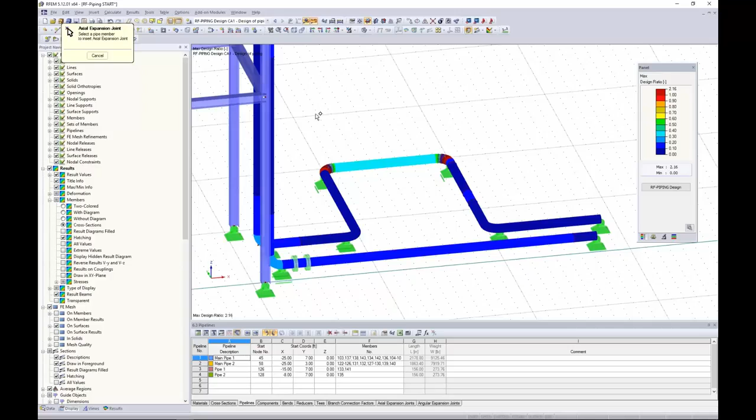That's where I mentioned that we would go back into an expansion joint. Although I'm still technically in this piping module, just viewing my results, I can still make changes in RFEM because I'm still concurrently in RFEM. So what we're going to do is add a new expansion joint. I just need to select the pipe I'd like to apply it to.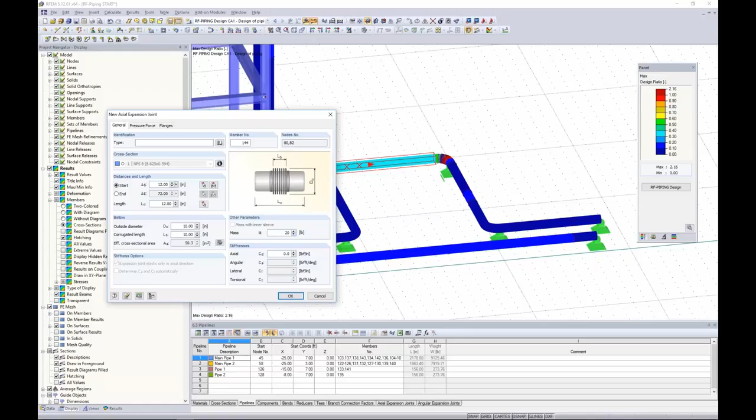Now the effective cross-sectional area: we have a details button here, and what we can do is either define the outside diameter, the inside diameter, calculate the mean diameter, or directly type in the effective cross-sectional area. For me, I'm going to assume the mean diameter is 8 inches and click OK. Our effective cross-sectional area is automatically calculated. We do need to give it a mass of, let's say, 20 pounds, as well as a stiffness, an axial stiffness. For this, we might get the information from the manufacturer that it's 150 pounds per inch.

The pressure force is the thrust force due to the internal pressure within this expansion joint. Here we have both options for the start and end of the expansion joint. We can apply the entire force, just the bellow, which updates this graphic here, or no force at all. For our case, we'll leave this as entire force.

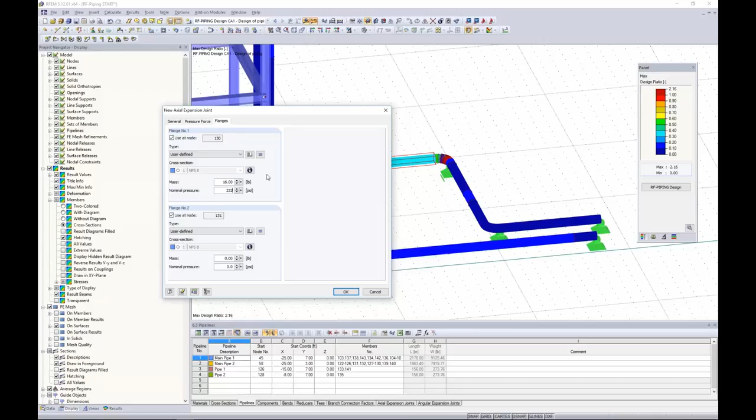Now for the flanges, I want to apply our general flange of 16 pounds, 232 psi, to both nodes. Once I click OK, it'll ask if I want to clear my results. That's fine. And here is my expansion joint that was just generated.

Now, it's quite common for expansion joints to be added in pairs, not so common for them to be added individually. So maybe we want to quickly add a second expansion joint to this new piping member that was created here. Everything is the same except now I want to choose to start at 12 inches from the member end. Flying through this other information, the length will once again be 12 inches.

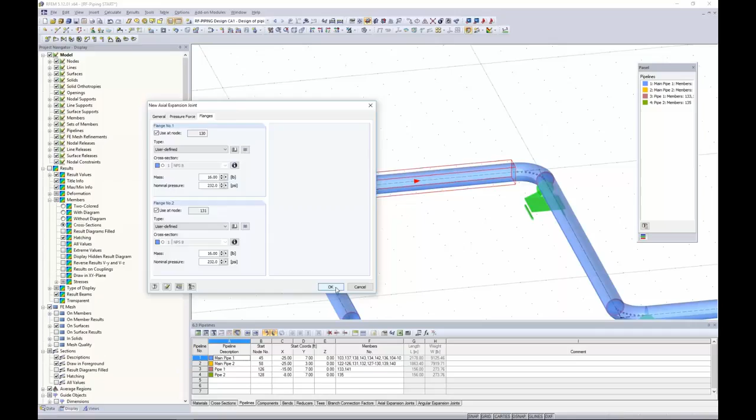The outside diameter is 10, the corrugated length is 10, and my mean diameter is going to be 8 inches. The mass was given to us by the manufacturer, 20 pounds, with a stiffness of 150 pounds per inch. For the flanges, we will apply our 16-pound flanges, 232 psi, to both nodes and click OK. So now we have our second expansion joint added here.

So what we'd like to do is rerun those calculations back in our piping module. Right now, as I mentioned, our drop-down says we're in RF piping design. I can always go to my add-on modules and go to my current module since that's currently selected. So we'll rerun our calculation here, cycling through the load case combinations, now with those expansion joints added.

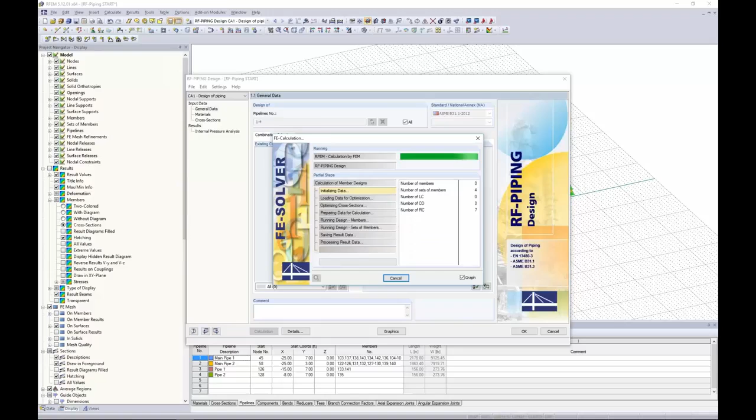Now we can see here that the overall code check was decreased significantly. So by adding in those expansion joints, we've decreased the stresses in those bends. Keep in mind, if I make any changes to the cross-section or the design pressure temperatures of my cross-sections, I probably want to go back and double check this internal pressure analysis to make sure everything is checked. These are two separate checks.

One additional thing I want to point out that I think is really strong with our program versus others is that for all of these checks, we give you all the code references along with the variables. For example, if we're looking at one of these expansion checks, you can see in our additional information down here all of the variables that went into play along with the code references for those variables and how they're calculated. Remember stress intensification factors, things like that. The design formula is even given down here according to section 104.8.3, equation 17.

We can even expand some of these trees here to get our design internal forces, cross-section properties. So we want to be very clear to you as a user where your numbers are coming from, rather than being a black box. You can always export all this design information back into Microsoft Excel for further sorting as well. So pretty powerful in terms of our data output.

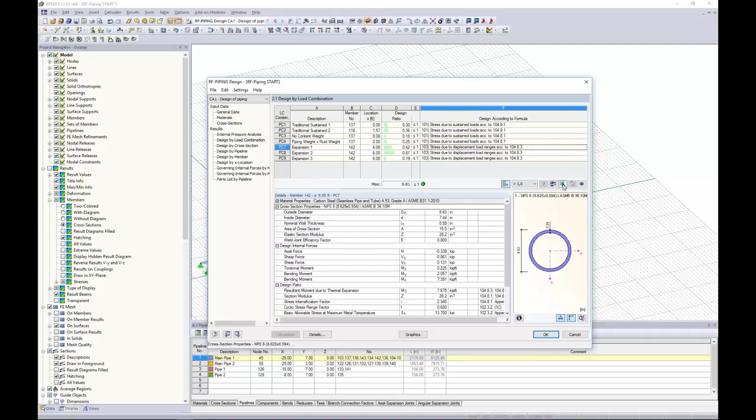So now we are done with the piping design. The last couple things I want to touch on, number one, is the design of our supporting structure here. So the supporting structure, we can further add in loads. Remember I mentioned we have dead loads, live loads, snow loads. We can add all those loads to our supporting steel members here, create load combinations, and we can go into one of our add-on modules called RF Steel AISC.

Now this add-on module looks identical to what we were just using with the piping members. So again, once you learn one module, a lot of the modules are set up the same. So then we could design according to the AISC 2016 standard if we choose to do so. Point being that you can design both the supporting structure and the piping members all within one model, so you can take into account that interaction.

I do have further webinars that go into much more detail on steel design alone, for example, and you can find those on our YouTube channel or on our website, so I won't have time to get into that today. Now, lastly, I want to touch on our printout report.

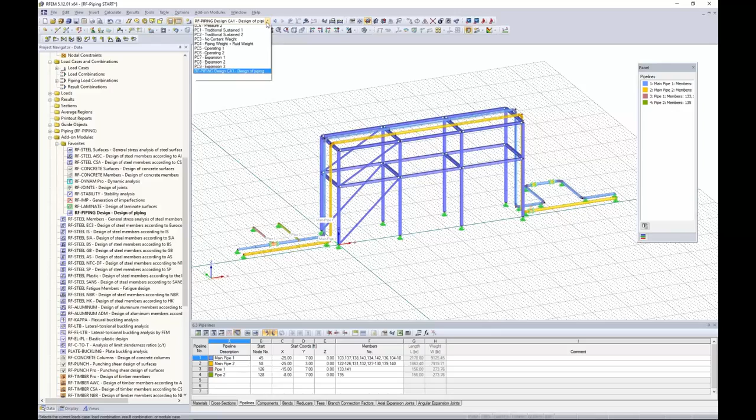So let's assume, for example, we have these loads that we've applied to our piping members, and we'd like to quickly add a picture of this to our printout report. We're ready, we've done the design, we're ready to submit these for review. Well, we have this nice feature up here to print a graphic.

Now, typically with print a graphic, you would have to individually change your load case, print it off, come back in RFEM, change it, print, and so forth. We have this option called mass print. Under mass print, the program has already populated what I'm currently looking at, assuming that I'm wanting to print off this. Now with mass print, I can select to print off all load cases and combinations, so I'm going to get a view of all those different loads printed off at once.

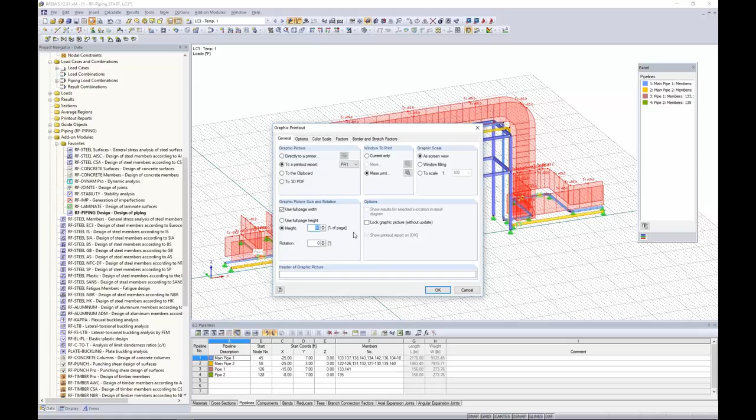I'm going to use 50% of the page height. That's great. I click OK. Now the program's saying, okay, well, you haven't created a printout report yet, so let's set up a template. So I click OK with that.

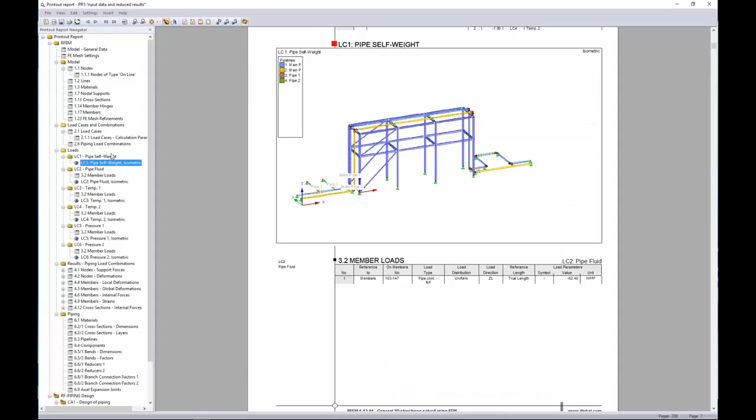Now the program will automatically jump into an additional application here that shows our printout report. So with the printout report, we have our table of contents over here on the left, and there are our pictures that we just printed off. They're allocated into the correct location, so they're automatically put into this section, loads, and now I can scroll down through. I can see my pipe fluid added here along with my table, temperature 1, temperature 2, and so forth.

And if I ever decide I don't really love the view of this particular picture, I can always right-click to edit it. And maybe I want to zoom in here to just this section that I'm most concerned with. I click back. Now this printout report, and in particular that picture, will automatically be updated to show that new view.

Something else that's extremely powerful is that these pictures are all synced up to our current RFEM module or our current RFEM file. So if I were to go back into RFEM and make any changes to these loads, the pictures will automatically be updated when I come back into the printout report, so I don't have to worry about reprinting those.

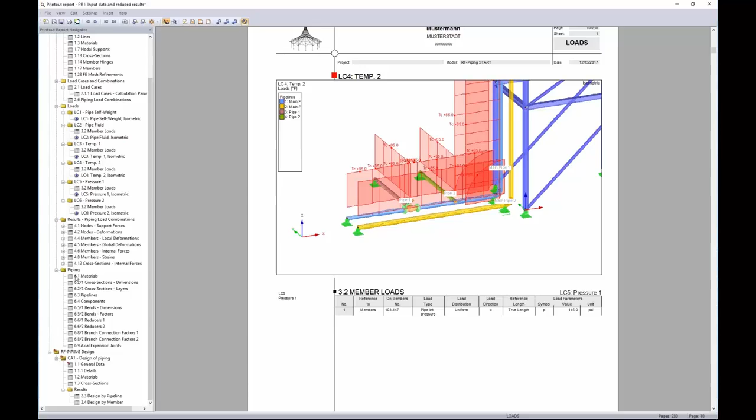And as you can see, we have all of our input data for our supporting structure from RFEM, which would be our pipe rack, and then we have our input data for our piping system, including RF piping design. So if we scroll down here to RF piping design, remember I had shared with you, well, we give you all the code references, all the variables, all the design internal forces.

Not all of that has to be printed out. You can see here that it's nice and short and sweet. We give you the controlling code reference, the controlling ratio, and that's really it.

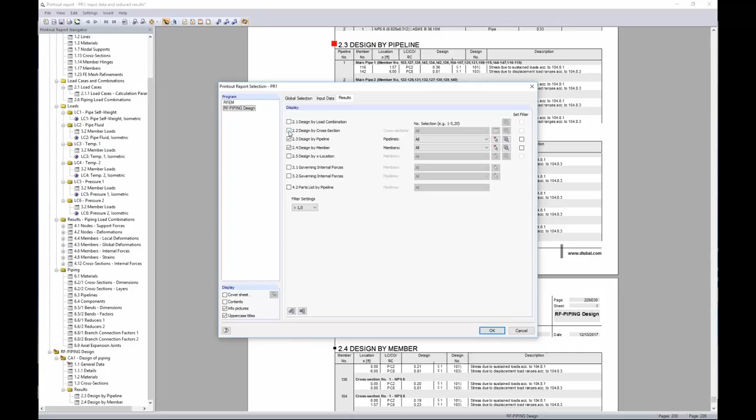But if you want to add any more information, maybe this isn't complete enough for you, under Edit, Selection, for example, here's both RFEM and RF-PIPING Design. This is where you can uncheck and check boxes all day long to make it catered to what you want to include in your printout report. You can also save templates and use those templates for additional files, including adjusting your header and your own logo. So quite powerful when it comes to our printout report as well.

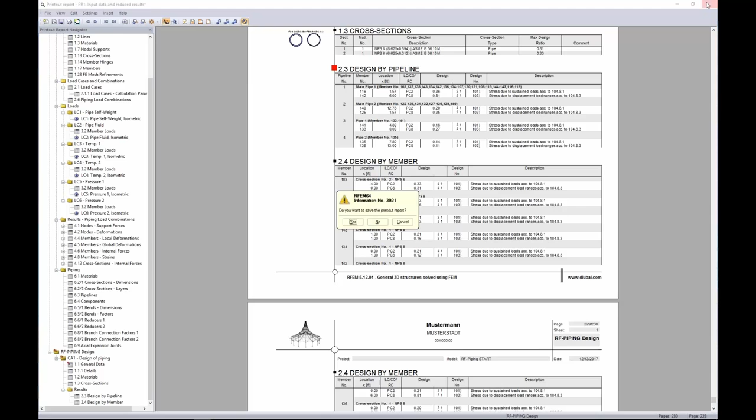Okay, so that concludes our webinar today. So I will continue on with our PowerPoint. That was, of course, so much information within the last hour.